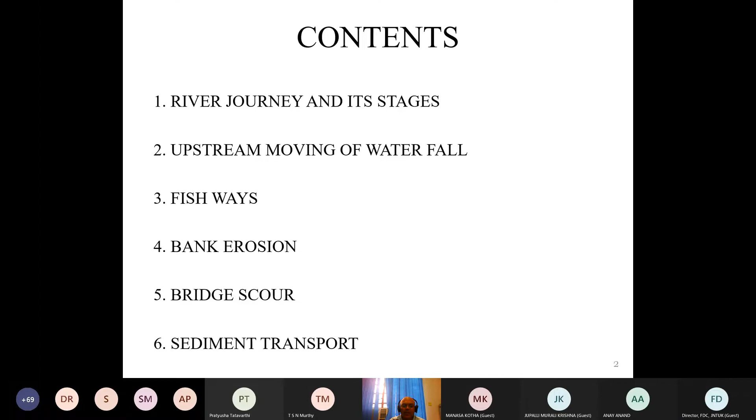These are the major contents of my presentation: a river's journey and its stages, upstream moving waterfalls, fishways, bank erosion, bridge scour, and sediment transport.

Rivers usually begin in mountains, because in mountains a river starts as gullies. They collect water from rain as well as snow, and these gullies meet and form tributaries. At the beginning of a river, these tributaries confluence and become a river, and you see that it has got different stages.

In the hilly, mountainous regions, it flows through a steep gradient. Then in the middle region, it's a gentler, almost flat gradient near the sea.

The mountain stretch is called the Young River. Since the water flows with high velocity, it cuts through mountains and hills, developing V-shaped valleys. These are very deep valleys.

The mature river is at the mid-level — once the gradient becomes a little flat, it is a mature river. Here it has widened valleys, and bank erosion takes place instead of bank cutting.

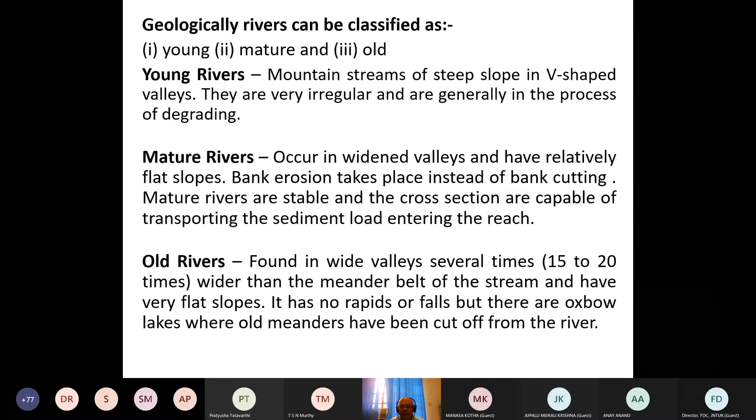Next, old rivers — these we can say are in the plains. Here the width is very large, and they meander, also forming deltas and levees.

In the youthful stage, it has a deep valley, and in the mature stage it is still deep, but not as deep as in the youthful stage, with a wider floor. In the old stage, it is very flat — the depth of the river is less, whereas the width is very large.

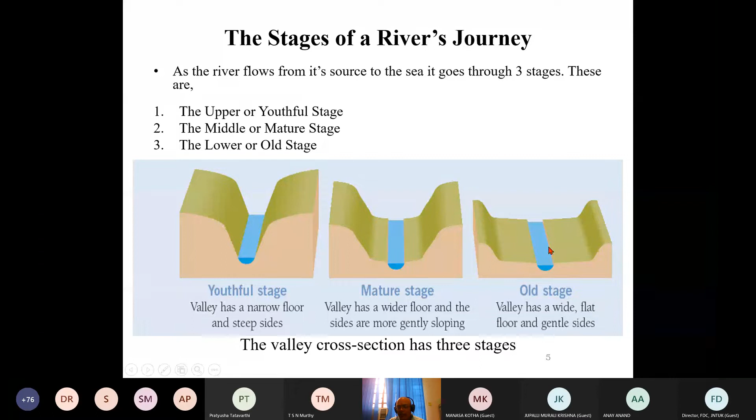Initially, in the youthful stage, the river cuts this deep valley, but since the slopes are very vertical and steep, due to weathering it forms a V-shaped valley. Whatever banks are eroded gets transported as sediment and deposited elsewhere, finally forming this V-shaped valley.

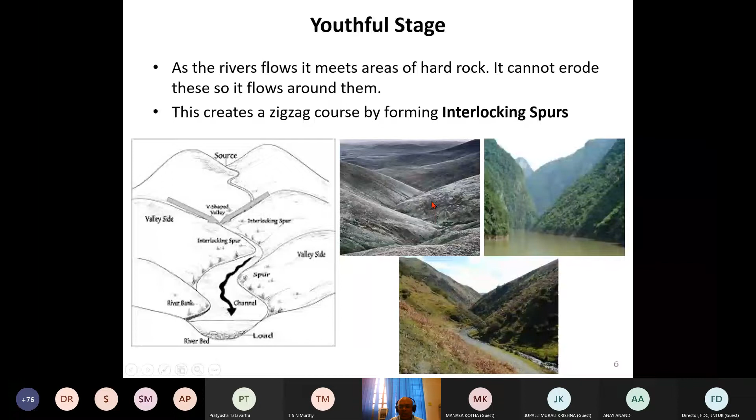In the hilly regions, since the river passes through hard rock and sometimes cannot erode it, it forms a zigzag course with interlocking spurs. If you see any of our rivers like the Ganges or Brahmaputra, in the mountainous region the river goes in a zigzag fashion with interlocking spurs, and the valley is also quite deep.

So in the mature stage, the slope is a little less, and here the river meanders. In meandering, the river forms an S-shaped geometry. What happens is the river cuts the outer bank, and deposits that sediment in the inner bank. So pools develop, and finally, with time, it forms an S-shaped pattern, and these bends become sharper.

I'll explain. You can see in this right side figure, on the outer bank a pool will be developed, and at the inner bank a riffle will be developed.

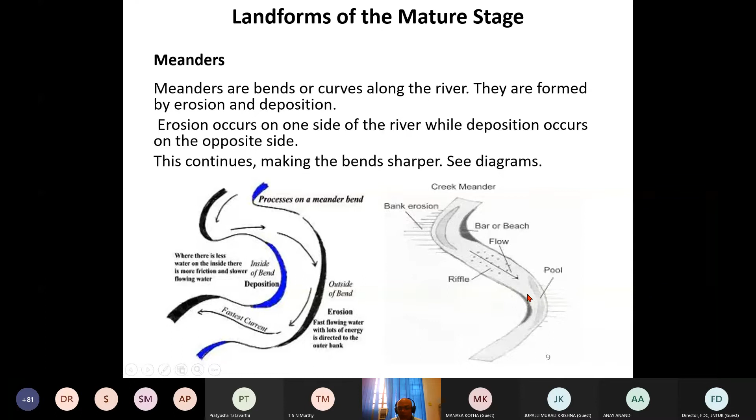These are the top views of meandering rivers. To form this kind of meandering river takes thousands of years, and finally these bends become very sharp, and once it becomes very sharp, the river tries to reduce the distance.

So then it cuts - it shortcuts - and by shortcutting it forms an Oxbow Lake. Earlier it was like this, but now the river cut short its route so that a lake is formed.

In this figure, you can see this is the inner bank. At the inner bank, sediment is deposited - this is called a riffle. And at the outer bank, here it is very deep.

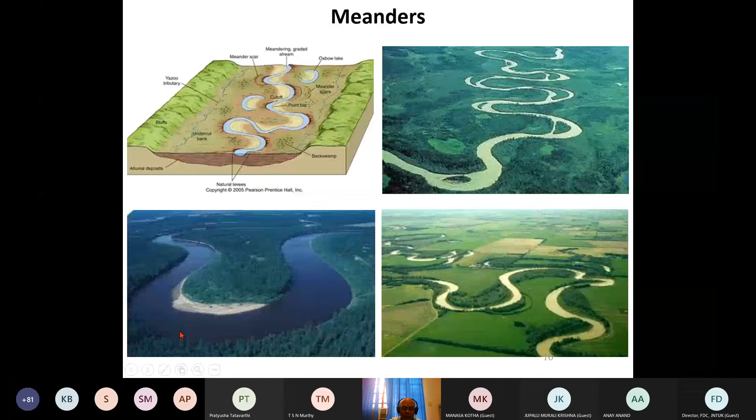In India also, if you see the Hooghly River near Kolkata, the river is meandering and continuously cutting the land. Recently there was a problem because one apartment complex is very close to the river bank, and the river bank is being eroded because of this meandering. Now the state government is taking efforts to secure that bank.

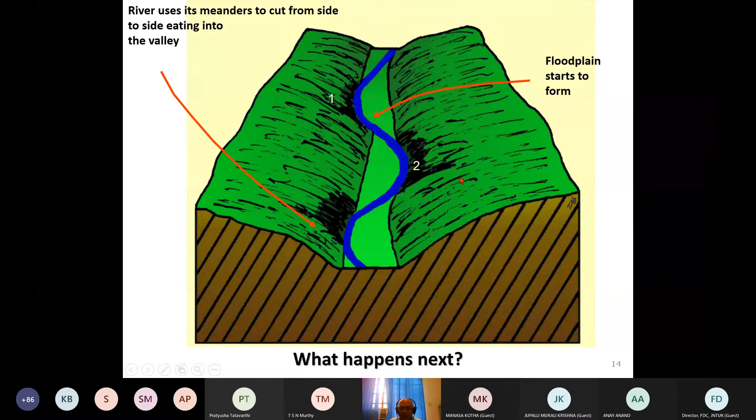Those steep cliffs are called river cliffs. Since the river is transporting sediment from the mountainous region, which is mainly rock formations, but this river flows with velocity and has the ability to weather these rocks, and these rocks are pulverized - they become sand, and it also picks up organic material while flowing. So sand and organic material form this river bed.

This is called alluvial deposits, and since it has got a mixture of sediments, fine and gravel, and organic material, it is very fertile, this alluvial. Later on, because the river is changing its course, this land will be useful for agriculture.

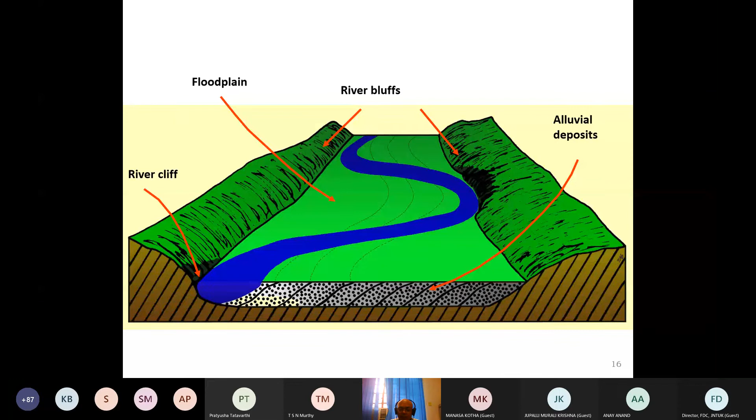That's why if you look at this soil adjacent to the river Ganges, it is very fertile, because that soil is transported by the river through millions of years from the upper reaches. This is, as I mentioned, a floodplain, and this floodplain consists of alluvium - very fertile soil.

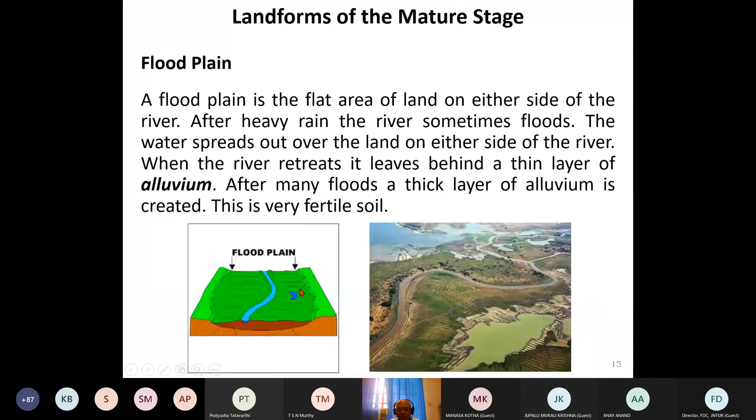In the old stage, once the river enters its old stage, maybe a few hundred or tens of kilometers down, the river meets the ocean. This is a plain land, and here the water velocity will be low. Since velocity is low, its sediment carrying capacity is also low.

So the river deposits sediments in this old stage, forming levees and deltas. The Godavari and Krishna rivers, when they join the Bay of Bengal, form deltas. It's not restricted to Godavari and Krishna though—most of our east flowing rivers form deltas, including the Mahanadi.

This is how an Oxbow Lake is created, as shown in this figure. The river forms meanders, and the curve becomes sharper and sharper. Finally, because the river tries to take a shortcut—to reduce the frictional slope—it cuts this narrow portion, reducing its length, so the frictional slope becomes less.

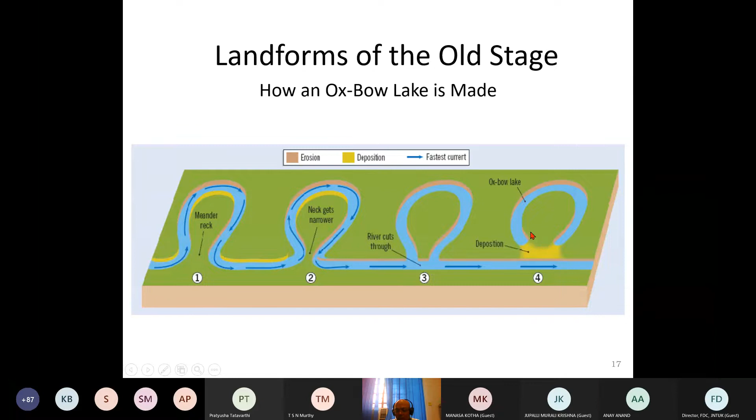Finally, the river is reaching the sea, and you can see it forming a delta here. The river is divided into small distributaries, and between distributaries there are islands. These islands are called deltas because they are created by sediment transported by the river, and they are very fertile—these deltas are very important for agricultural production.

We can say that rivers are a lifeline for humans, because we get drinking water and water for agriculture, as well as deltas for agricultural production. You can also see that levees are formed here—a levee is nothing but a river bank. Since rivers carry sediment, it gets deposited on the banks of the river, and these are called levees.

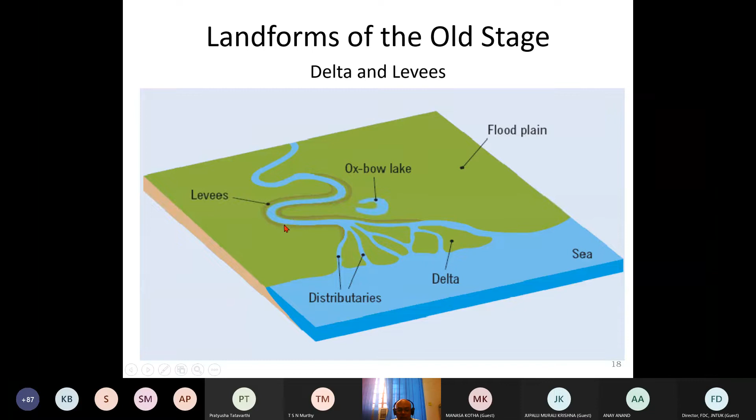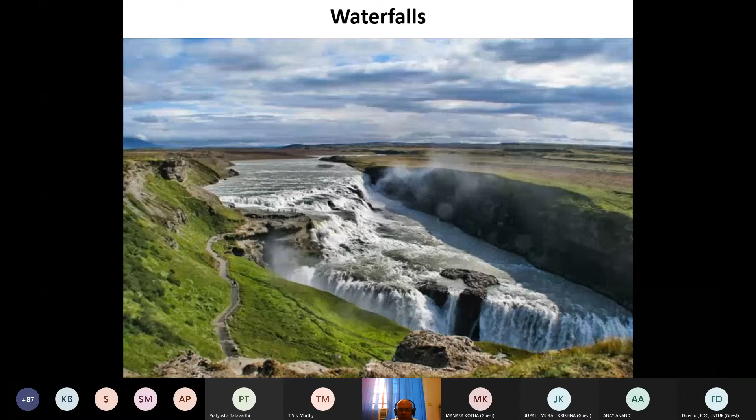In the same way, rivers create waterfalls. If you look at Niagara Falls, which is between two lakes—Lake Erie and Lake Ontario—the elevation between the two lakes is very high. The water flows from Lake Erie to Lake Ontario, and since the elevation difference between these two lakes is too high, the waterfall is created naturally.

How are these waterfalls created? When there is a hard rock and below it a soft rock, water flows over the hard rock onto the softer rock. Due to this, the potential energy of the water erodes the softer rock, but it cannot erode the hard rock. This falling water creates a deep pool, called a plunge pool.

Even though water cannot easily erode hard rock, since it carries sediment, the abrasive action of this sediment against the hard rock causes it to erode over time. Because of this eroding capacity, many waterfalls move upstream, maybe a few centimeters per year. The plunge pool acts like a cushion for the falling water.

In hydraulic structures, fishways are an important topic. In India we don't give too much importance to this, but in Western countries fishways are a very hot topic for research, because we like salmon fish for eating. When salmon lay eggs, they move upstream to where the flow velocity is less and vegetation is present in the water—these areas are called spawning grounds, generally located in the upper reaches of the river.

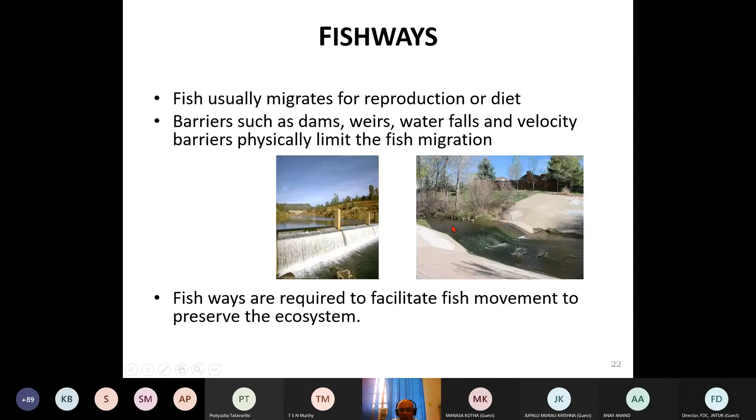So the fish move from downstream to upstream and lay eggs there. Once they've laid eggs, they move back downstream. To make this movement happen, we need to provide fishways to preserve the ecosystem, because nowadays rivers are obstructed by dams, barrages, weirs, etc., so fish cannot move freely upstream and downstream. To facilitate this movement, we need to provide fishways.

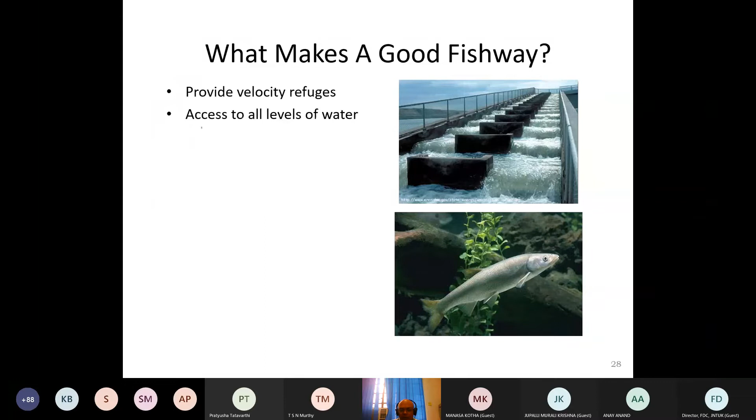You can see that this is a fishway here. Generally, fishways are provided with a 1:30 slope so fish can go both ways, upstream and downstream.

So this is a bypass fishway. There is a weir, which cannot facilitate fish to move up and down. Therefore a fishway is provided here. Since it has taken a detour, the length is more, so frictional slope, that is HF by L, is less, and there is a control here at the exit. So water is allowed to flow through here. To move fish from downstream to upstream, a notch is provided in the weir, so there is more water available here, and that attracts fish. So fish moves through this fish passage and it moves upstream, crossing this weir.

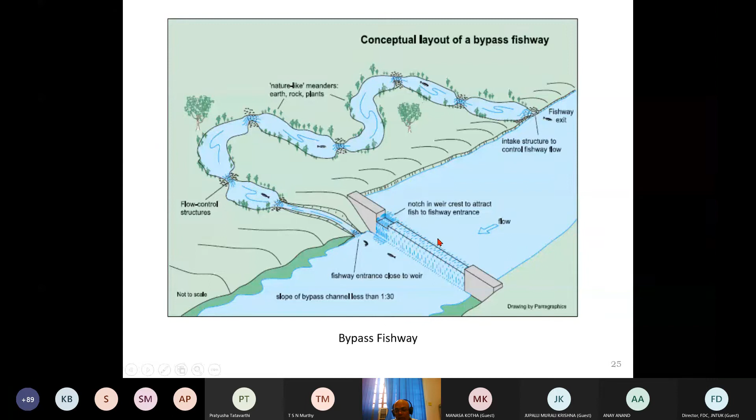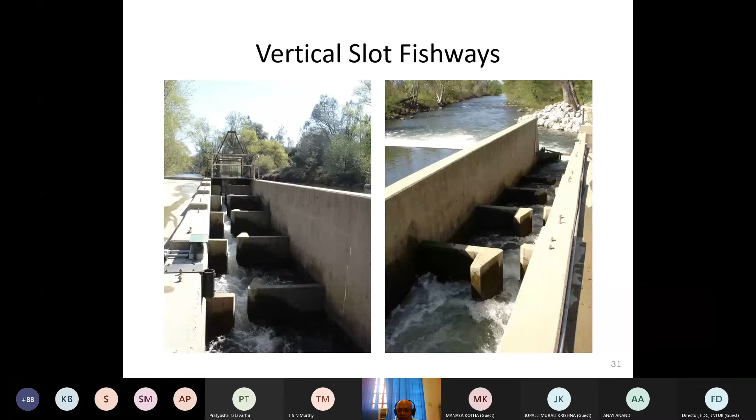So most popular fishways are vertical slot fishways. This is a vertical slot fishway. You can see that there is a small dike here, and this flow is in a zigzag fashion. So in this, the velocity will be low and depth is high because of this barrier. Since water is allowed to flow in zigzag fashion, the velocity will be low, so fishes can move upstream and downstream. So this vertical slot fishway is a more popular fishway.

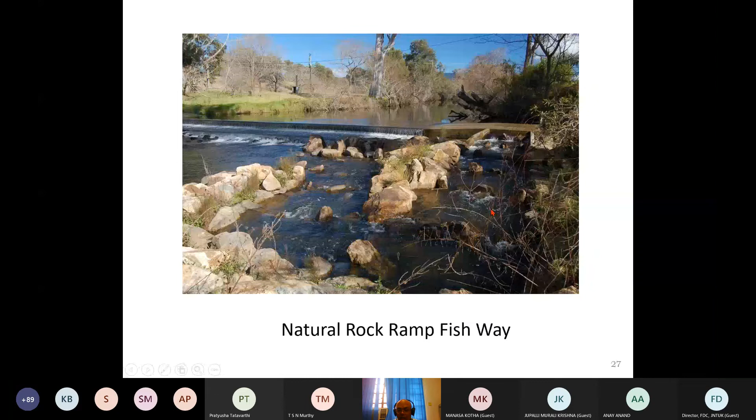And this is a natural rock ramp fishway. You can see that there is a small weir here, and fish cannot go up, cannot cross from the downstream to upstream, cannot cross this weir. So therefore a separate channel is provided using rocks. Since the distance is more, flow will be less and the friction is high, so therefore flow depth is high, so fish can easily move upstream and easily cross this weir structure. So these are conceptual figures.

So the next important topic in sediment transport is bank erosion. This is a very serious problem in Assam, because the Brahmaputra is cutting the banks. Thousands of hectares of agricultural land is gone because of this bank erosion. So I'm going to discuss the types of bank erosion.

So these are the important terms in bank erosion. Bank erosion is nothing but detachment, entrainment and removal of bank material as individual grains. Bank failure is the collapse of all or part of the bank in response to geotechnical instability. Bank retreat is the recession of the bank as a result of erosion. Bank advance is opposite to bank retreat, where the river is depositing sediment and pulling the bank inside the river. Bank erodibility is the ease with which bank material particles and aggregates can be detached.

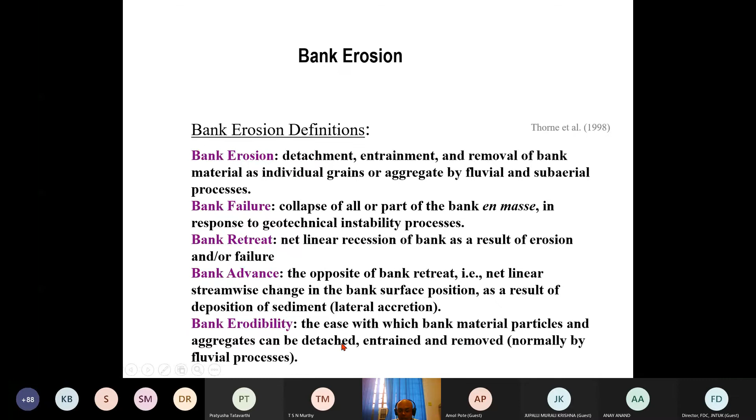You can see in this figure, so this is a river bank. Before this erosion, the river bank was a couple of meters inside, but due to this bank erosion, you can see that there is an agricultural well that got damaged due to this bank retreat. Not only this agricultural well, you can see that this land is lost. This is a very serious problem, and one way to address it is to provide sheet piling or concrete river banks. But rivers run for thousands of kilometers, so it's economically not feasible to provide concrete banks.

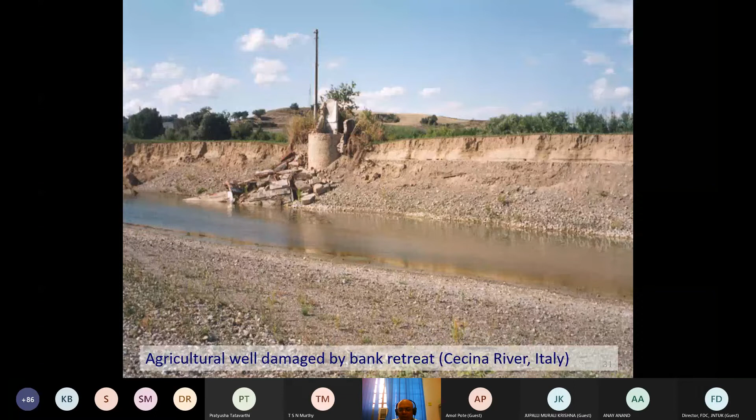So therefore, generally we tackle the problem by locally addressing the issue. That means where the river is aggressively cutting the bank, there we provide some dikes or guide vanes, or strengthen the bank with geotechnical engineering, etc.

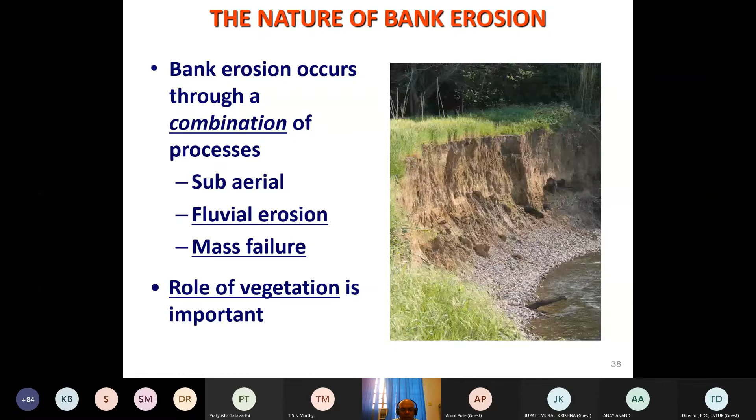So bank erosion occurs through these processes. These are three important processes: subaerial process, fluvial erosion, and mass failure. Bank erosion is also influenced by the role of vegetation, which can increase or decrease bank erosion, which I will discuss. So first I will discuss these three types of bank erosion processes.

So the subaerial processes - the main physical process here is freeze and thaw. These subaerial processes happen due to temperature effects, and generally occur in the upper region of the river, in the mountainous regions, where the temperature changes are quite high. So in the winter, the water in the voids expands and loosens the bank.

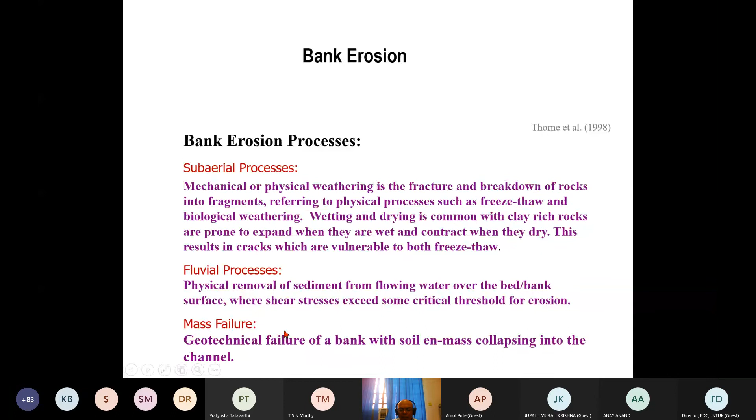And mass failure - this is mainly geotechnical failure of the bank, caused by pore water pressure and groundwater effect. When the slope exceeds the angle of repose, mass failure takes place.

So subaerial processes are mainly due to climate, fluvial processes are mainly due to local shear stress distribution, stream power and secondary currents, and mass failure is due to bank angle, bank composition, bank height, and pore water pressure.

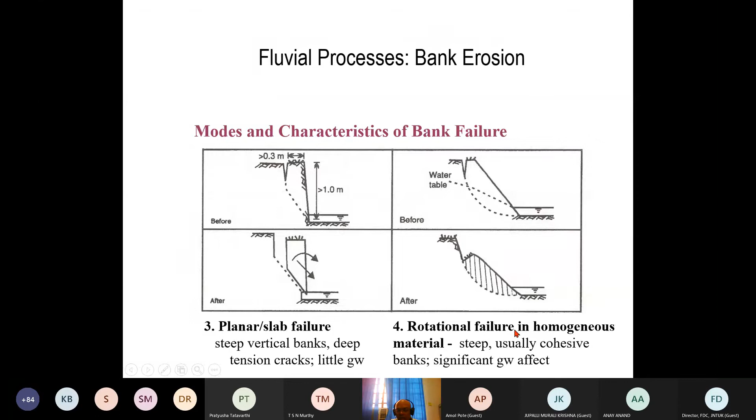And the fourth type is called rotational failure. In rotational failure, it is similar to the planar failure, but here the failure surface is an arc or circular. Usually these rotational failures occur in cohesive banks.

Again here you can see a cohesive bank - due to rotational failure, there is a hard surface here, and above it is cohesive material. Because of this tension crack, the cohesive bank actually failed, and this is called rotational failure, because the failure surface is circular.

And here you can see this is again a cohesive bank - because of the groundwater effect or pore water effect, this part of the bank failed as a rotational failure.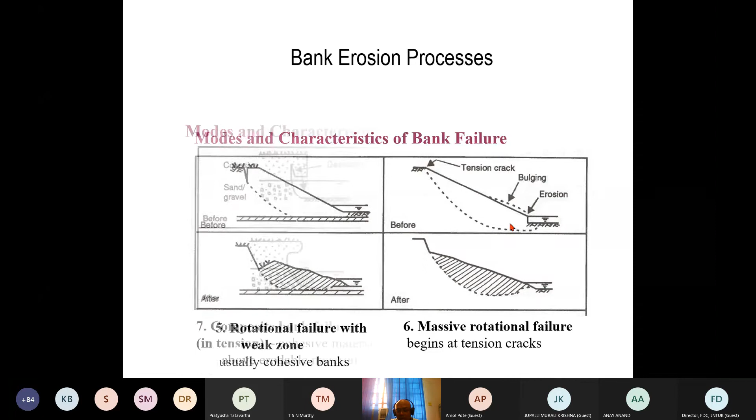So these are another two types. You can see this is a composite material, sand and gravel, and above there is a cohesive material. Due to the flow, the sand and gravel eroded, and there is a slab formation here.

With time, there is undercut into this cohesive soil, and part of this bank failed. So this is composite, called a composite bank failure. Another bank failure is similar, but instead of that overhung part, the entire part slided into the river. So this is another type of bank failure.

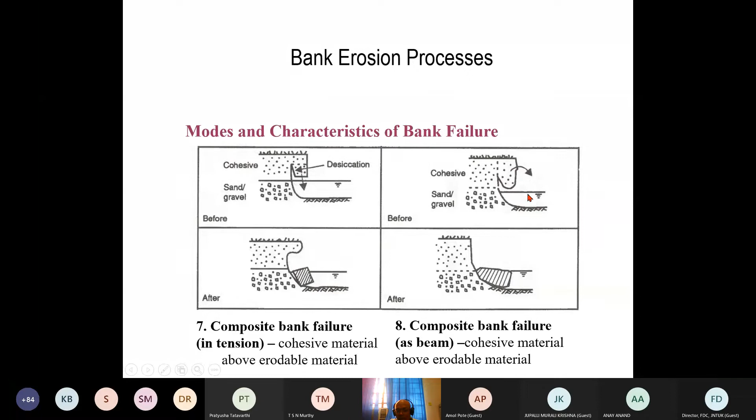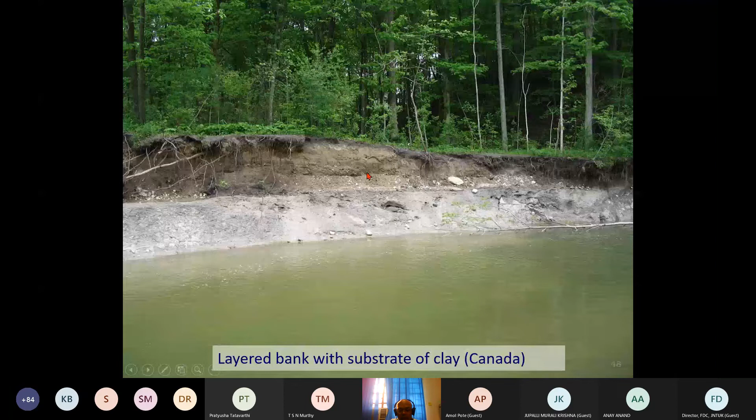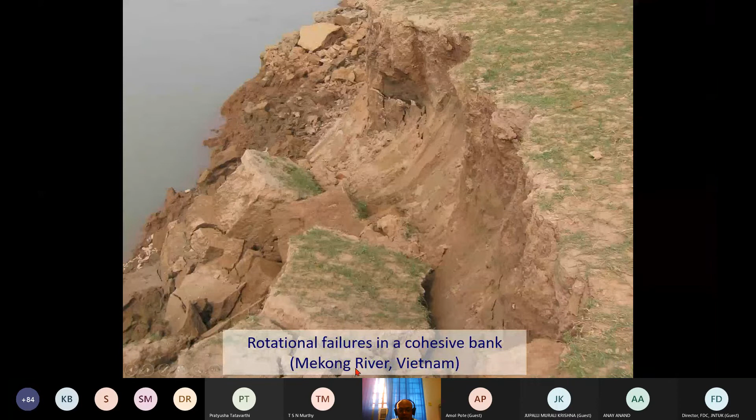This is a bank failure due to subaerial processes, because these subaerial processes occur in the younger, higher region of the river. That means at higher altitude, where the river is just forming, in those areas bank failure occurs because of the subaerial process, due to the cold climate.

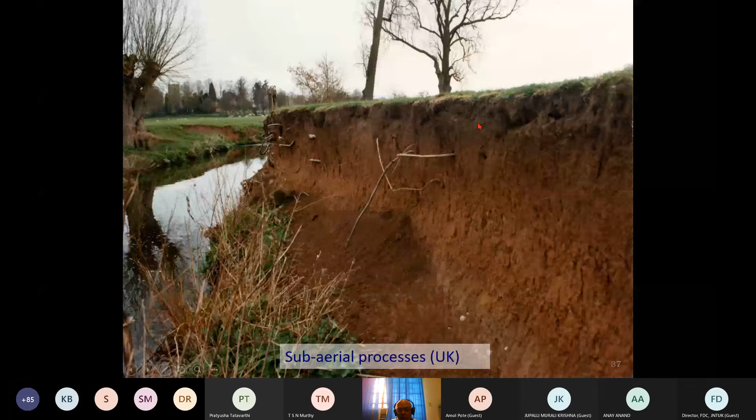This is a mass failure in the Sieve River, Italy. So this is a highly unstable bank in the Sieve River.

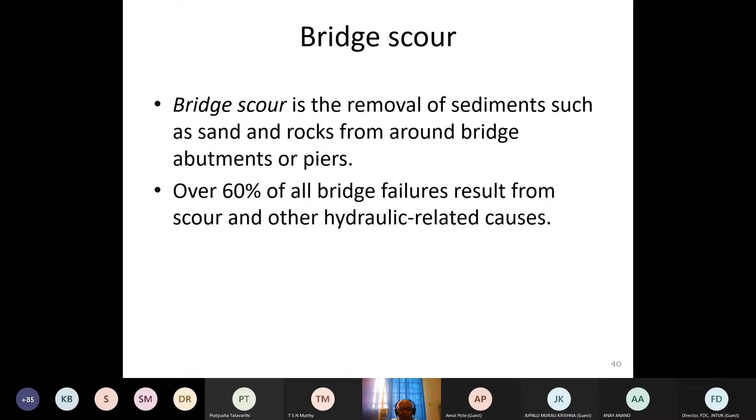So the next important phenomenon is bridge scour. Bridge scour is the removal of sediments such as sand and rocks from around bridge abutments or piers. About 60% of bridges fail because of pier scour. I am showing you some figures.

You see these bridge foundations, bridge piers, they are made with shallow foundations. Whenever water flows around this bridge pier, because of the turbulence and mixing, the soil erodes around the pier. Slowly with time, that gets deepened, and finally the foundation is exposed. It goes up to the foundation, and due to that the bearing capacity decreases, and ultimately the bridge fails.

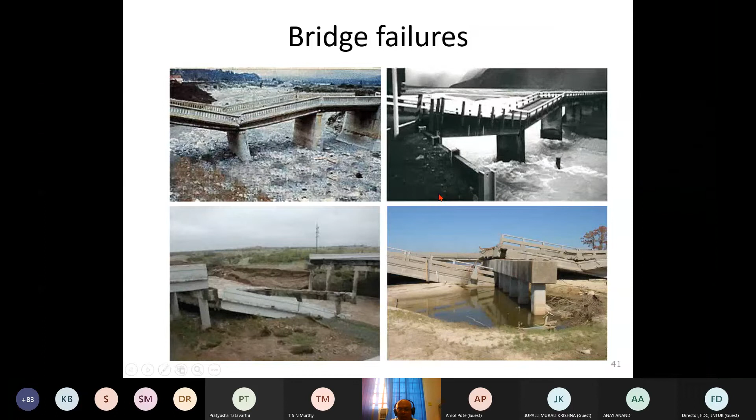You can see that these are all bridge failures. Around the world, more than 60% of bridges fail because of pier scour.

So the main agents of pier scour are stagnation of the flow. What is stagnation of the flow? In front of, at the nose of the pier, the water is stopped. That is called stagnation, and then there is a stagnation pressure.

And non-uniform velocity distribution. Because in a river, if you look at the velocity profile, it is non-uniform. Velocity at the bed is 0 and the velocity increases gradually, then in the outer layer the velocity is almost constant. Because of this non-uniform velocity distribution, the stagnation pressure will be high near the free surface, and therefore there is a downward flow.

Then, because most flows in rivers, pipes, or canals are turbulent fluid flow, and turbulent flow is always 3D, meaning the three components U, V, W are different. So when this flow traverses around the bridge pier, there is a boundary layer separation which is also three-dimensional since it's a 3D flow. Then behind the bridge pier, wake vortices develop.

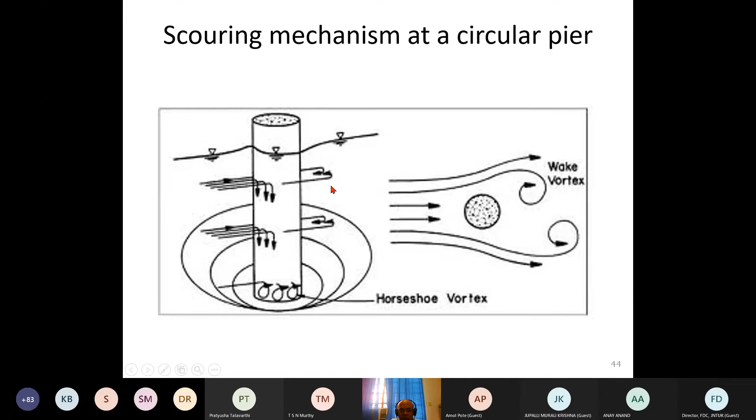And near the free surface, surface rollers are formed. The surface rollers are similar to the horseshoe vortex. You can clearly visualize, because when there is a circular motion of the fluid at the bed, that erodes. You can see here this is a clockwise rotation of the fluid. When it is indulging in this clockwise rotation, it erodes the bed and carries the sediment downstream.

You can see wake vortex here, because behind this pier there is a velocity deficit due to the vacuum created by the pier. Here the flow is very lethargic. The pressure is very low behind this bridge pier because of this wake. Since the flow has very low energy here, whatever sediment is eroded at the nose of the pier gets deposited here.

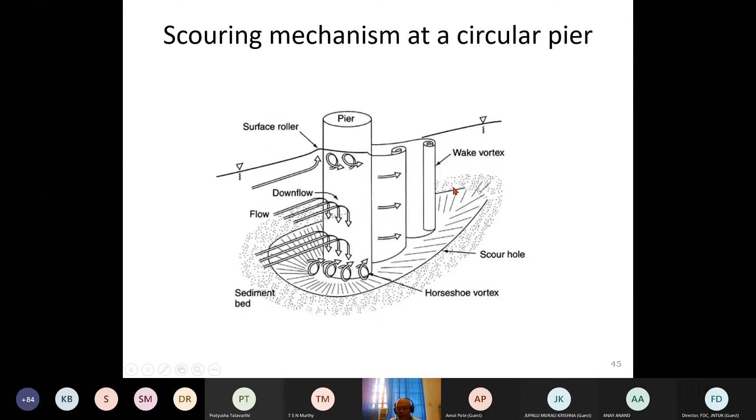So what is turbulent fluid flow? It consists of full of eddies, or we can say the flow is chaotic, random, and velocities are fluctuating, and it is full of eddies. Due to these fluctuating velocities, it erodes.

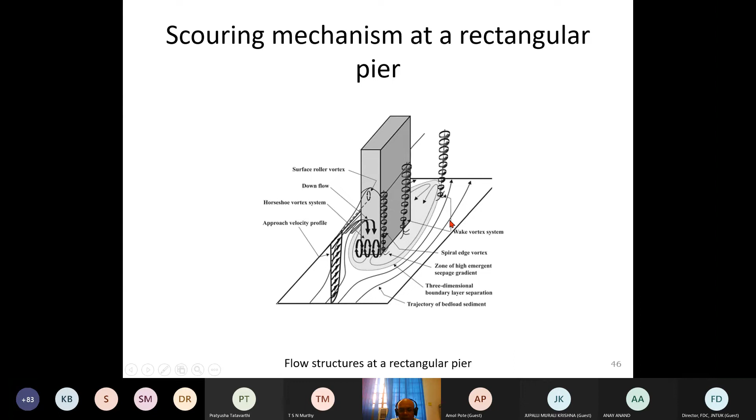If the foundation of the pier is below this depth, then the pier is safe. But if the foundation is within this ds, then the bearing capacity will be low, so the pier will lean and then the bridge will collapse.

Earlier there was not sufficient understanding of this scouring phenomena, so the bridges constructed earlier were mostly rested on shallow foundations. Therefore the old bridges are in danger.

Of course, railways or roadways are taking care of this. I'm going to explain what methods they are adopting to safeguard the foundation of these old bridges. But for new bridges, the government is going for a deep foundation, that is pile foundation, so they are safe from bridge pier scour.

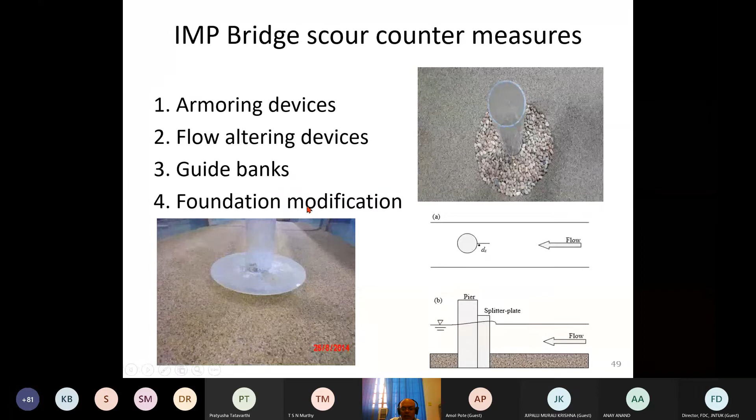Generally, guide banks are provided for abutments so that they gradually attract the flow. Therefore there's less turbulence near the abutment and less mixing, so therefore less scour. The last resort is foundation modification, that is going for a deep foundation from a shallow foundation.

So the next important topic is sediment transport. In sediment transport, we tackle this question: how sediment moves in response to flowing water. The conditions that will transport sediments are needed for engineering problems.

So when there is sediment transport taking place, then we have to maintain this channel.

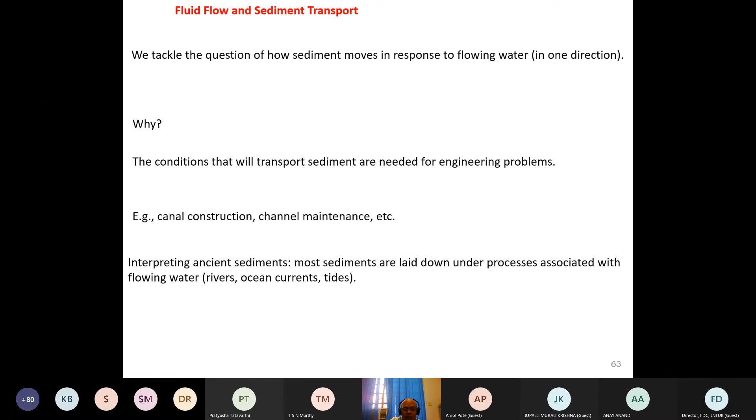So when an equilibrium condition develops, that is when the velocity reaches a constant velocity u, then we can write the shear stress at the bottom plate as tau is equal to mu into du by dy.

Where du by dy is velocity gradient. Here we are considering only laminar flow. This du by dy is nothing but rate of shear strain, and tau is shear stress. They are related by the fluid property, that is mu.

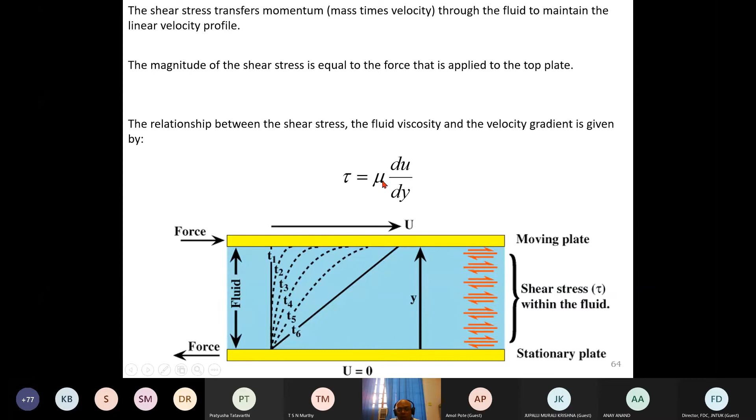So we can write tau, shear stress, is equal to mu into this velocity gradient, and from this equation we can derive velocity. By integrating we get velocity is equal to tau by mu y plus c.

So tau is the shear stress at the bottom plate, and y is the distance between the plates, so mu is dynamic viscosity. By applying the no slip boundary condition at the bottom plate, we get u is equal to tau by mu y.

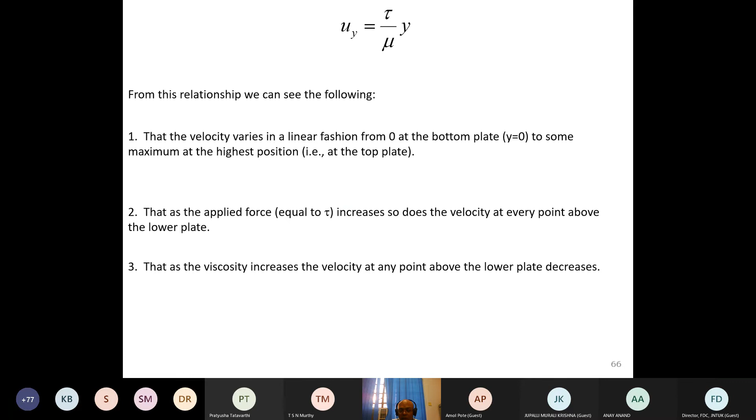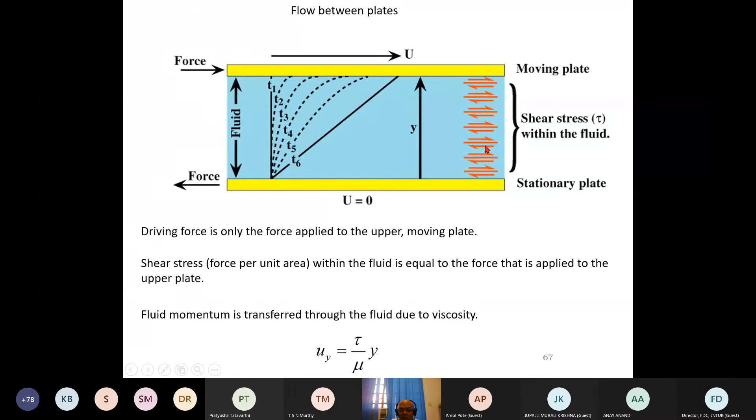So you can see that this is a laminar flow, where flow is taking place as layers. In between layers, there is a shear stress tau, and this tau is nothing but momentum transferred between the two layers.

So let's take one open channel flow example. You can see that the channel bed is inclined at theta, and we can take a fluid element which is y distance above the bed. This fluid element has dimensions d minus y and 1, 1, with z as this direction. So in the z direction the fluid element has size d minus y, and in the streamwise and lateral directions the size of the element is unit.

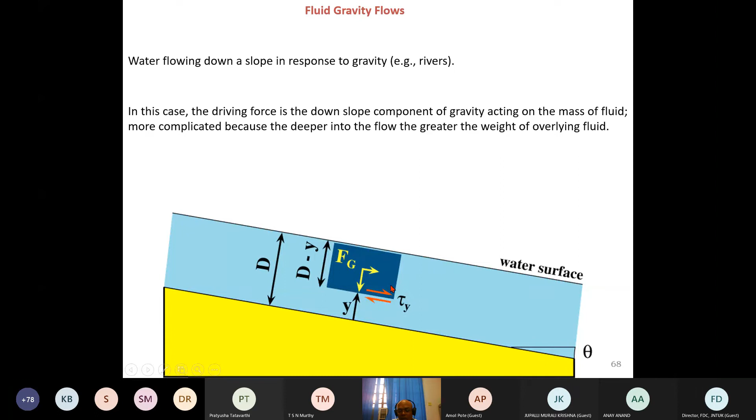So the units are d minus y, 1 into 1. Theta is the slope, and tau y is the stress, because this fluid element is moving, so there is a layer below this fluid element. The stress between the fluid element and the layer below is tau y. Because it is a uniform open channel flow, the gravitational force is balanced by the shear stress between the element and the surrounding fluid.

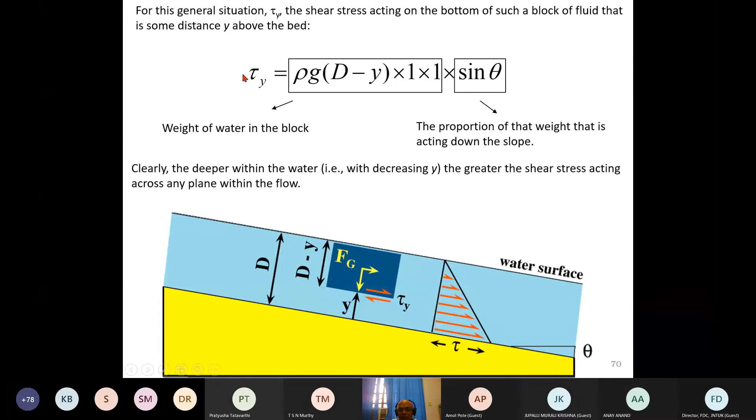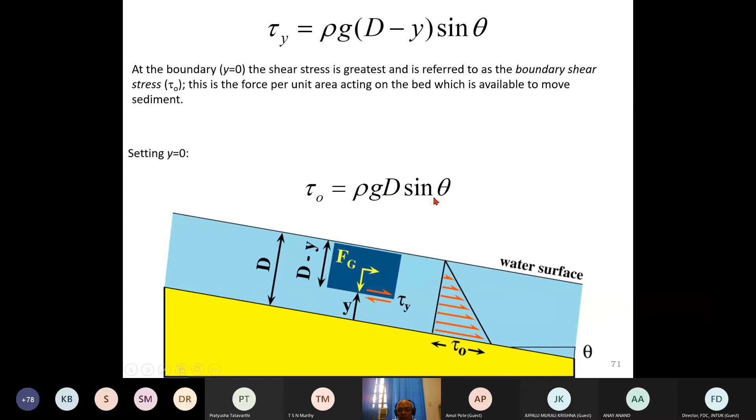So the gravitational force we can write as gamma into d minus y into sine theta. The right side is the gravitational component and the left side is the shear stress. From this relation we can get the equation for velocity. Suppose we take y equal to 0, then the shear stress equals the bed shear stress tau naught, which is equal to rho g d sine theta. So tau y is rho g d minus y sine theta.

So tau y is nothing but mu into du by dy, from the Newtonian fluid condition. So we can write tau is equal to mu into du by dy. Then finally we can write du by dy is equal to gamma sine theta d minus y by mu.

So let us integrate to get velocity u. When we integrate, du is equal to integration of gamma sine theta d minus y by mu dy. Then we can write u is equal to gamma sine theta by mu, integration of d minus y dy plus c. Integrating this term gives yd minus y squared by 2 plus c.

So when we apply the no slip condition at the boundary, we get u is equal to gamma sine theta by mu, yd minus y squared by 2. This is the equation for velocity distribution in laminar open channel flow, because the assumption in this derivation is laminar flow, since we took tau equal to mu into du by dy, which is only applicable for laminar flow, and this equation is parabolic.

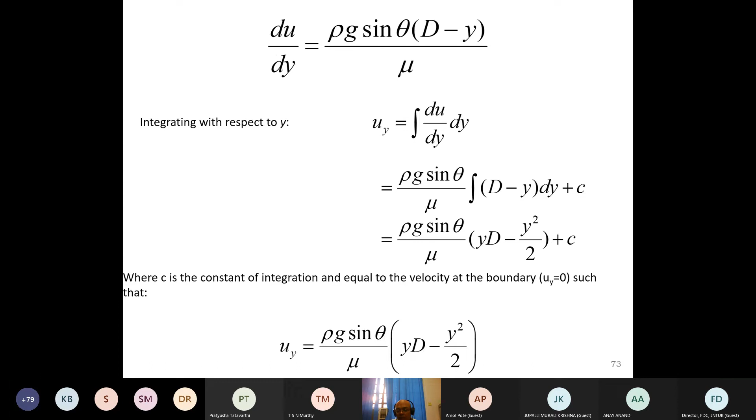Because this is a parabolic equation, we can say that laminar flow on a flat plate, or laminar flow in an open channel, has a parabolic velocity distribution.

So you know the definition of steady flow. That means the flow velocity or flow depth are not changing over time, whereas uniform flow definition is either velocity or flow depth are not changing along the channel, and laminar flow is based on the Reynolds number.

If Reynolds number is below the threshold, then it is laminar flow. The threshold is different for different types of flow phenomena. For pipe flow, the threshold Reynolds number is 2000, so below 2000 flow is laminar, but for open channel flow it is 500. If Reynolds number is below 500, flow is laminar.

So you can see that in laminar flow, the shear stress distribution is linear and velocity distribution is parabolic.

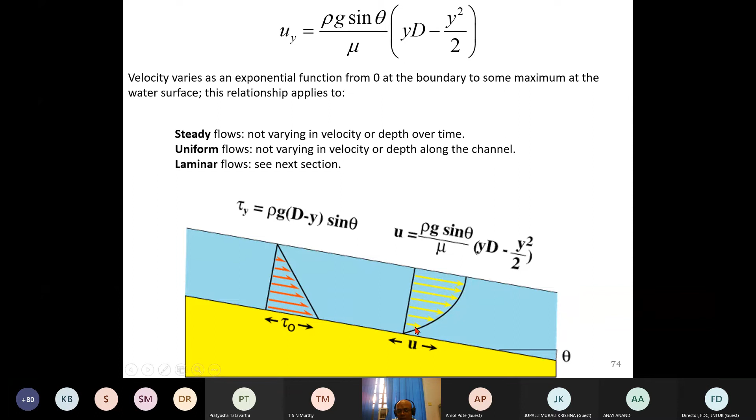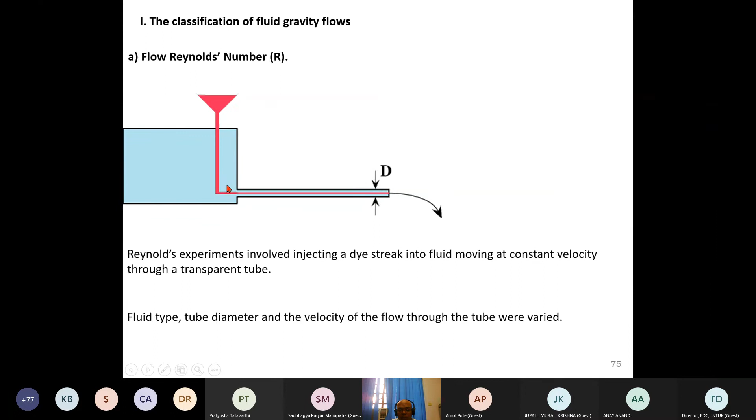Dye is released into this pipe connected to the tank. When the flow velocity is low, you can see the dye follows a straight path. Once we increase velocity and bring the flow into the transitional zone, then dye follows a wavy path, and if we further increase the velocity and the flow becomes turbulent, we can see dye rapidly mixed throughout the fluid.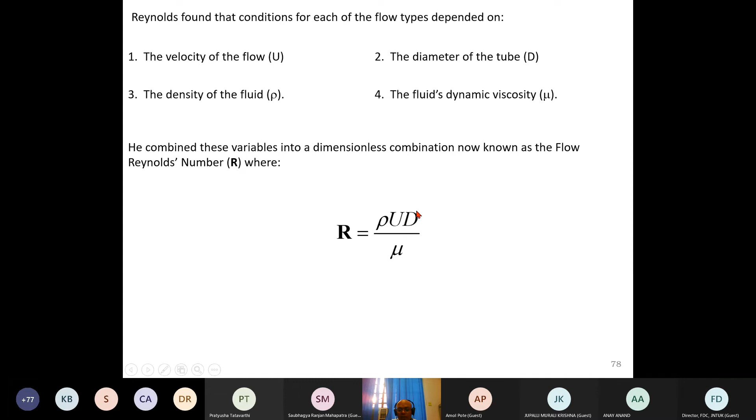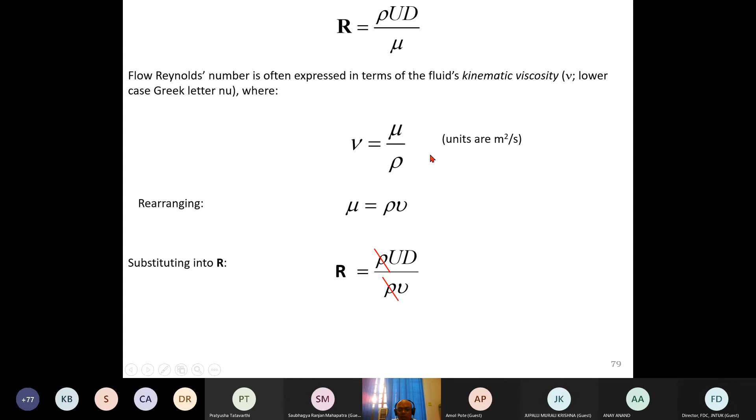Reynolds proposed a Reynolds number, which is a ratio of inertial force to viscous force. R is Reynolds number, equal to rho*u*d divided by mu. This formula is obtained by dimensional analysis. Here rho is mass density of fluid, u is the velocity of flow, d is diameter, a length scale, and mu is dynamic viscosity. Kinematic viscosity nu equals mu by rho, so we can write Reynolds number as u*d/nu.

For laminar flow, Reynolds number is less than 2000 in pipe flow. We can establish laminar flow, and here the streamlines are parallel to each other and straight. In transitional flow, it is developed for Reynolds numbers between 2000 to 4000 in pipe flow, and streamlines are wavy - parallel but wavy. Once we increase the flow rate and develop turbulent fluid flow, for Reynolds number more than 4000, we see streamlines without any pattern, intersecting each other. This is turbulent fluid flow.

These Reynolds numbers - 2000 threshold - this is only applicable for pipe flow. For flow over a flat plate, it will be around 10 power 5, and for open channel flow it is 500.

Why are we discussing laminar flow and turbulent flow? Because the flows we deal with in civil engineering are 99% turbulent, except the flow in our veins - our blood flow is laminar flow. But flow in drinking water pipelines, water distribution networks, flows in canals, rivers, flow in drainage channels - everywhere it is turbulent flow.

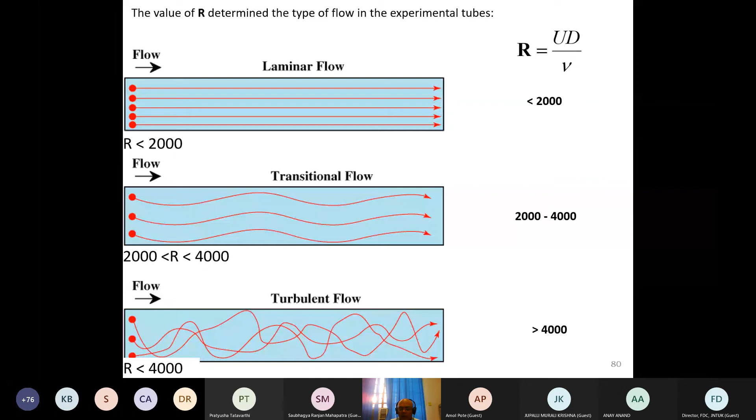So this is the visual figure. In laminar flow, we can see the dye following a straight path. In transitional flow, it is wavy and slightly diffusing. And in turbulent flow, it is completely mixed here.

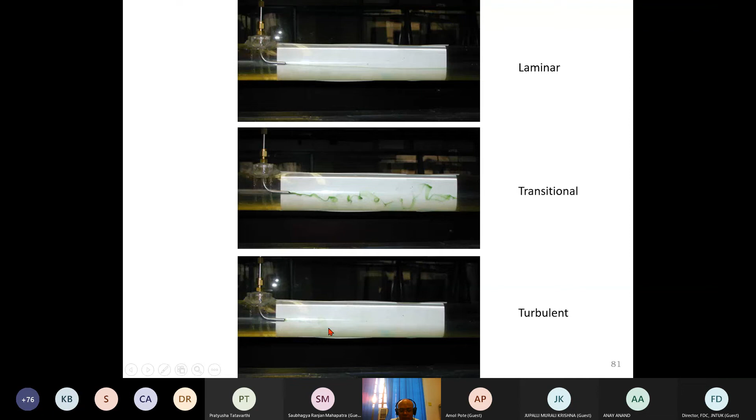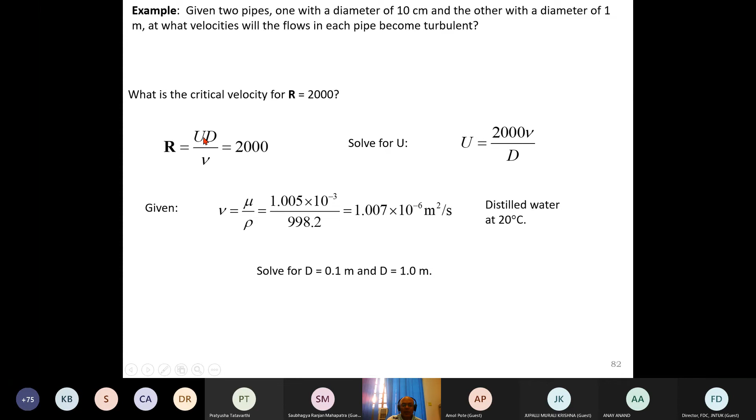So here is a small formula. Given two pipes with diameters 10 centimeters and 1 meter, at what velocities will the flow in each pipe become turbulent? We know the Reynolds number is 2000, we know the formula, and kinematic viscosity is around 1 into 10 power minus 6 meters squared per second. Then we need to determine U, since D is given. So from these calculations...

We found that in the small pipe, at 2 centimeter per second velocity, the flow becomes turbulent, our flow becomes transitional. And for the 1 meter diameter pipe, at 2 millimeter per second. So you see, as the length scale increases, the velocity decreases for getting a transitional flow.

So in our pipe flows, for bigger diameter pipes, the flow velocity will be around 1 meter per second, whereas for small diameter pipes like 10 centimeters, the flow will also be around 1 meter per second. So the flow is highly turbulent. And in open channel flow, the velocities are around less than 1 meter per second. Generally the flow velocity in our laboratory flumes is around 30 centimeter per second. So with this velocity also, the flow is highly turbulent.

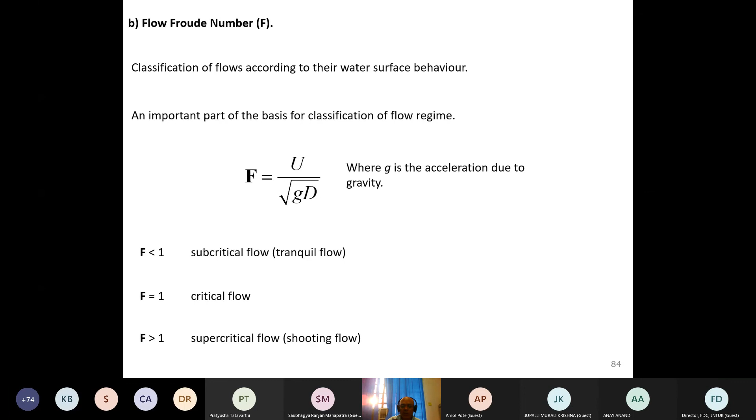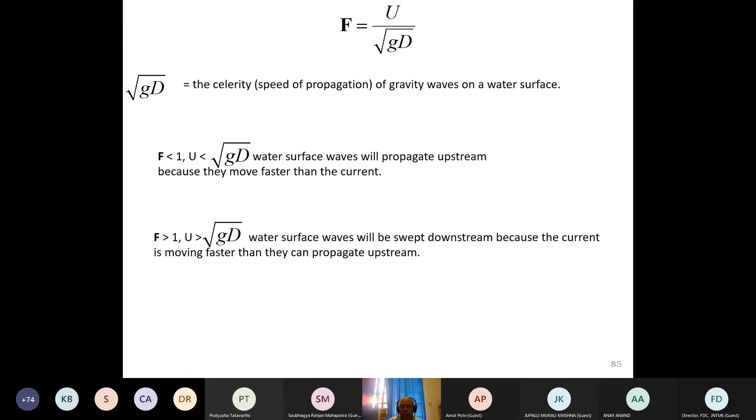In a subcritical flow, if you create any disturbance, it propagates in both directions, that is, the surface wave propagates in both directions. But whereas in supercritical flow, the flow velocity is more than the wave velocity. Therefore, the surface wave cannot propagate in the upstream direction. So in supercritical flow, any disturbance created downstream will not propagate in the upstream direction.

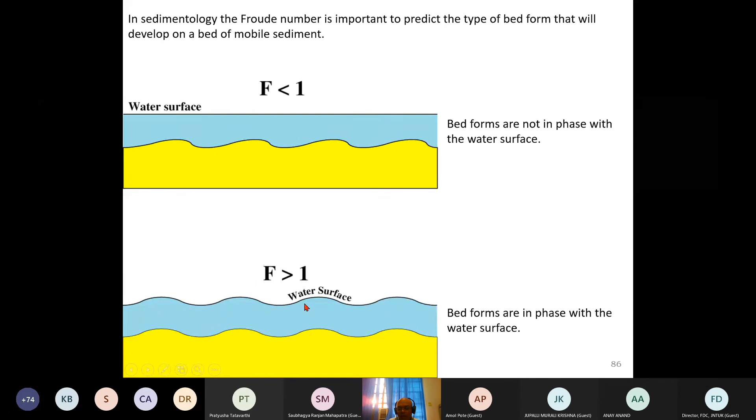But whereas in upper region flow, that is supercritical flow, anti-dunes are created. The anti-dunes are in phase with the surface. You can see the anti-dunes are in sinusoidal waves, and the water surface is also in tune with the bed, also in sinusoidal waves. These dunes and anti-dunes are very important because during floods, the bed load is mainly transported in the form of either dunes or anti-dunes, depending upon the Froude number.

Whereas in highly turbulent flow, similarly, the velocity gradient will be very high near the bed, and velocity is almost uniform. This velocity gradient near the bed, where the velocity gradient is very high, is called the viscous sublayer.

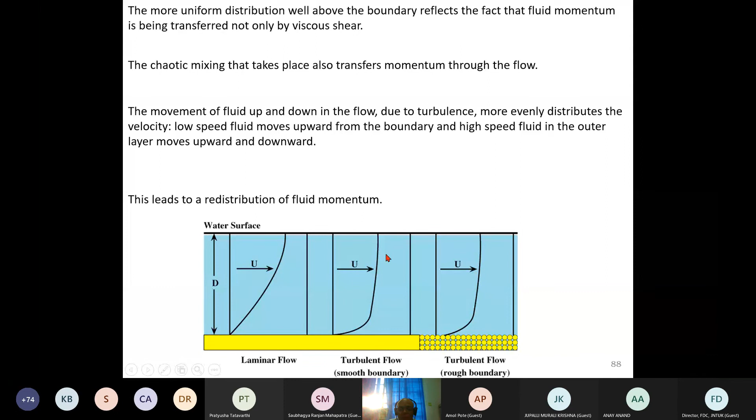So turbulent flows are made of two regions: one region is viscosity dominated and the other region is turbulence dominated. Viscosity dominated means this is called the viscous sublayer, where the flow is laminar. Away from this viscous sublayer, the flow is fully turbulent.

So for laminar flow, we know the shear stress tau equals mu into du by dy. But for turbulent flow, the shear stress has two components: one is contributed within this viscous sublayer and the other is outside the viscous sublayer.

So the shear stress at any depth is expressed as viscous shear stress plus turbulent shear stress. Turbulent shear stress is expressed as eta du by dy, where eta is called eddy viscosity, which is a function of flow properties. Whereas viscous shear stress, tau equals mu du by dy, where mu is the fluid property.

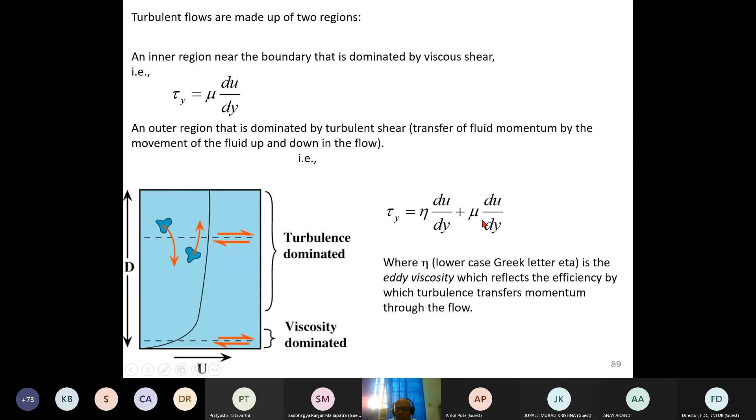In turbulent flows, viscous shear stress can be neglected because as Reynolds number increases, turbulent shear stress becomes orders of magnitude more than viscous shear stress, like 100 or 1000 times more. So we can safely neglect viscous shear stress in turbulent fluid flows.

We have derived the equation for velocity distribution in laminar open channel flow, but for turbulent fluid flows, another equation called the log law is developed.

Log law is a very popular velocity distribution equation for turbulent fluid flow. This equation is given for velocity distribution for hydraulically rough flow: u(y) by u star equals 8.5 plus 2.3 by kappa log of y by y naught. This y naught is called the zero velocity line, whereas kappa is called the von Karman constant.

So in any turbulent fluid flow, velocity distribution is given by the log law, which is proposed by von Karman. It's a very popular equation for finding velocities in turbulent fluid flow.

This zero velocity line, y naught, is determined as d by 30. This is proposed experimentally, where d is the grain size.

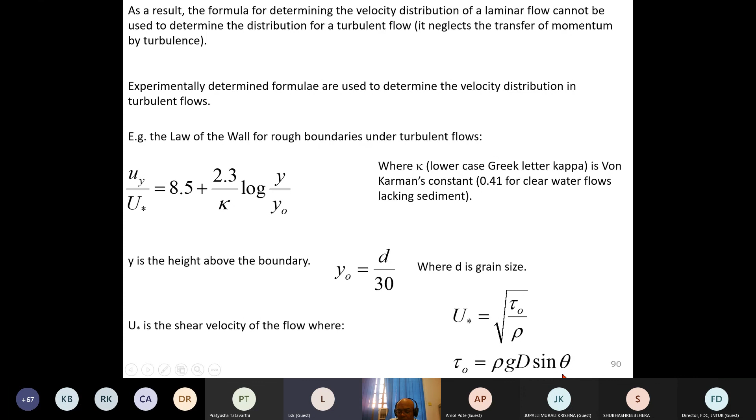We know that in open channel flows, the average velocity occurs at 0.6 depth from the free surface, or 40% depth above the boundary. From this equation, we can derive the equation for average velocity. So U bar is obtained by substituting y equals 0.4d, giving the equation for average velocity in an open channel flow.

The use of this equation is that by knowing the U star value and the y naught value, we can get the flow velocity at any depth. That is the use of the log law.